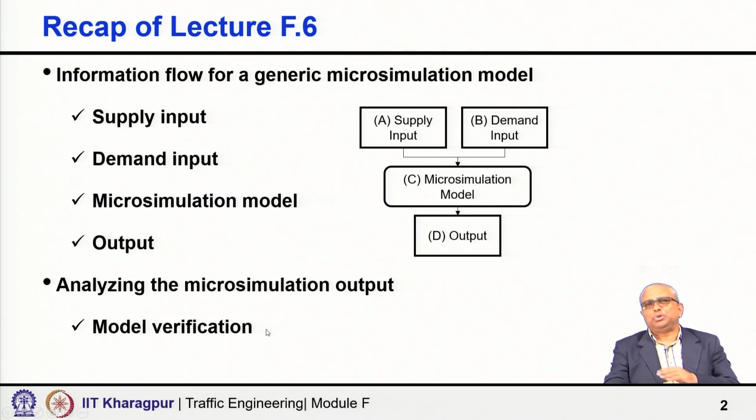So, we shall continue our discussion grossly about the output, this box component D, or here the output component, and we said that model verification, model calibration and model validation all are important. We discussed in lecture 6 the model verification part only. So, in continuation to the previous lecture, today we shall talk about model calibration and also model validation, and then also a few other important aspects regarding traffic microsimulation.

So, coming to model calibration, the ability to accurately and efficiently model traffic flow characteristics, driver behavior and traffic control operations is critical in order to obtain realistic microsimulation results or outputs. How accurately and how efficiently we are able to model all this. You know, there are different components or entities in a traffic microsimulation model. So, how accurately and efficiently we are able to model all such components, traffic flow characteristics, driver behavior, traffic control operations and all this. So, in that context the model calibration is important. Calibration is the process of modifying the default microsimulation parameters.

You know, when you are doing a traffic microsimulation, so many inputs, so many parameters are involved. Some of the parameters you can measure from the field, some of the parameters you cannot measure directly from the field, not so easy, right. So, how the default microsimulation parameters can be modified, so that the model replicates the observed traffic condition as accurately as possible. So, how to set the parameters which will suit, number 1, the context and the geographical areas.

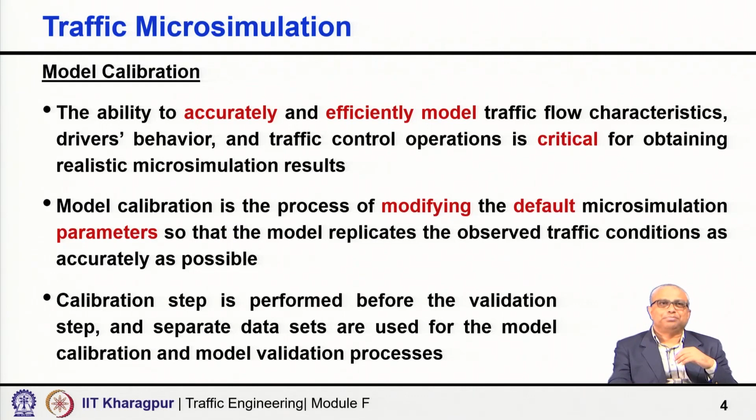What may calibration mean in the context of traffic micro simulation? It may mean setting the micro simulation model parameters properly. Say for example, if you are using Wiedemann 99 car following models, I have already mentioned to you the parameters CC0 to CC9. So, it may be all about what parameter values I use for each of these parameters, so that my output closely matches with reality.

Now, when you are applying this Wiedemann car following model in any European city, and if you are applying it in any Asian city or in India, say in Calcutta or in Delhi or Chennai, will the parameters be the same? No, because the whole traffic environment is very different. So, what may be good and appropriate for a European city may not be good for an Indian context.

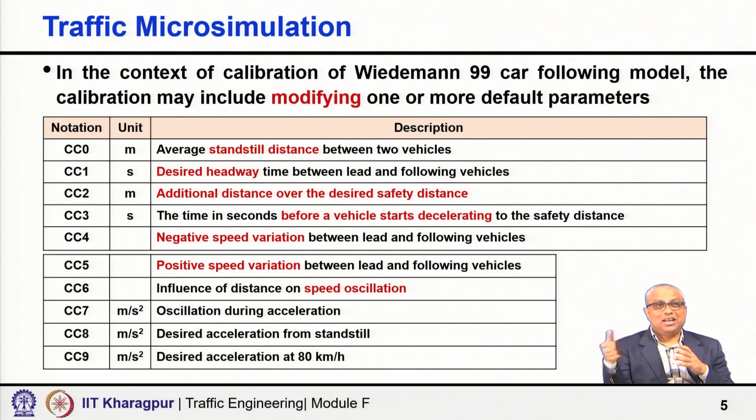So, how to decide, when you are developing a model for an Indian city or trying to apply it in an Indian city, how best this parameter can be taken, so that the output matches with our traffic condition, right. That is all about calibration.

Now, in the calibration process, the first step is selection of one or more field sites. As I say, it is important which intersection, if you are going to take intersections, for example, which intersection or intersections you are going to take. So, we must first select the one or more field sites where we want this model to be applied, right.

The next step is to define a set of performance measures. This relates to the other aspect I mentioned: what you are trying to do, why you are developing this model, what is your objective, right. So, accordingly you decide what should be your performance measure, how you are going to evaluate the performance. So, the performance measure is also very much context specific, meaning what you are trying to achieve.

And then the other thing is site specific or location specific, where I am trying to apply it for intersection improvement. So, for intersection improvement, what set of performance measures I should use, that is one aspect we are discussing here. The other is, once I say okay, I want to improve intersections, are you going to improve intersections in a European city or in an Indian city? That is what you have to select appropriately, then it is to be calibrated for the local condition and for the context. So, accordingly you decide what performance measures you want to take.

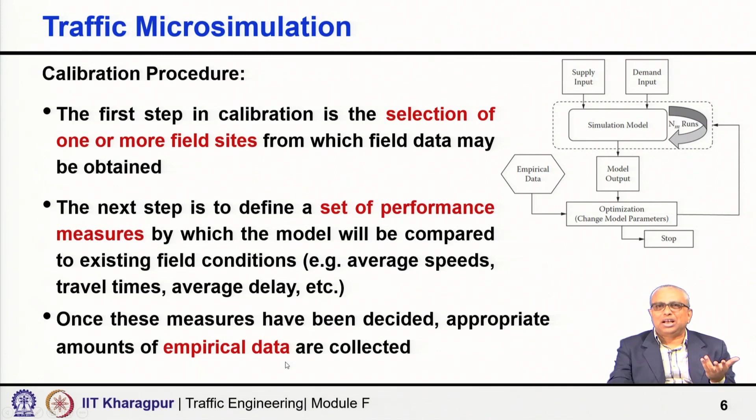Now, the observed network is generally modeled using an initial prior microsimulation parameter set. You have to start with some parameter set, right. You do not know exactly what set of parameters will be most appropriate. So, you start with a trial set, and sometimes it may be the default values.

If the traffic condition is really very similar to the traffic environment on which the microsimulator has been developed, as I said, many of the microsimulation platforms have been developed considering lane-based, more homogeneous, more disciplined traffic environments. So, if you are applying it in a European context or a Western countries context, you can start with the default parameters. But if you are going to do the same thing for an Indian context, you know that those parameters are anyhow not going to work.

So, if there are past studies, previous works where people have said that for this parameter this value is more suitable or appropriate, you can take those things. So, it may be default values, it may be based on previous calibration results, or it may be based on some engineering judgment also. Then you run the model and compare the performance measures obtained from the model with the ones you have obtained from the field data.

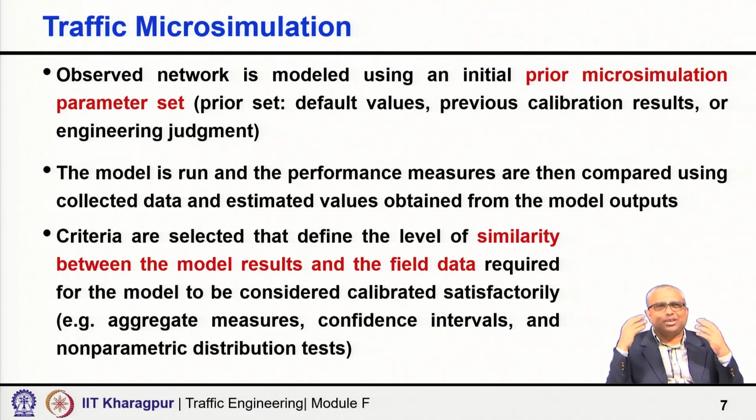So, through the criteria you have to say what level of similarity between the model result and the field data you expect in order to say that your model is calibrated satisfactorily. It could be aggregate measures, it could be some confidence interval, non-parametric distribution tests, a number of things are possible. You often need to carry out statistical tests.

Based on the results of the statistical tests, the model parameters are adjusted if you find that my errors are statistically significantly different; then further tuning, further adjustment of the model parameters may be required. So, the model parameters are adjusted and the same process is repeated until you find your simulated data matches the empirical data within the permissible or acceptable limit, as defined by the criteria. Then you consider that yes, now my model has been calibrated, and you stop the process. Now, remember that often the number of parameters in a microsimulation model is very high.

You have vehicle characteristics related parameters, you have driver behavior related parameters, so many inputs are there. Typically, if you take a good microsimulator, maybe 30 parameters or more than 30 parameters may be required. Those parameters are actually controlling the overall simulation output. So, will you start changing everything? It becomes a gigantic task. Most of the time it may not be required.

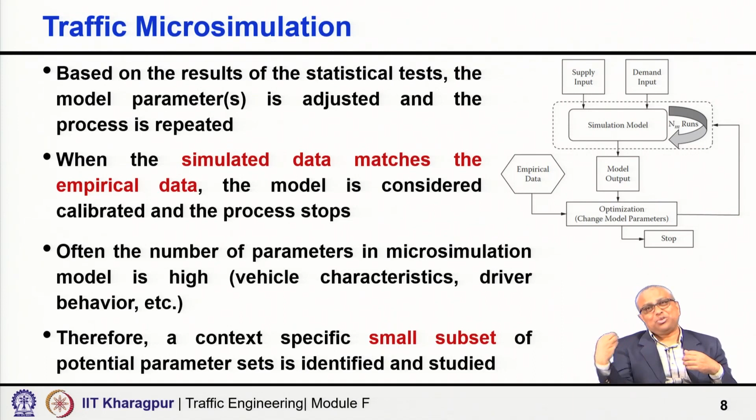Outside, you can use different search algorithms, you can use a genetic algorithm to give a trial, and every time you give a trial set you have to go inside the model and again take simulation runs, not one, multiple simulation runs, and then you compare the simulation output with the observed field data and the process has to continue.

Now, coming to model validation. Validation is the process of determining to what extent the model's underlying fundamental rules and relationships are able to adequately capture the targeted emergent properties of the model. You have calibrated. Calibrated means your output is matching, but have you really captured the relationships properly, or have you simply gone with multiple trials and somehow set the parameters so the calculations are somehow matching? That again needs to be tested.

So, an unknown data set which has not gone inside during the calibration step should be used, where the inputs are known and the outputs or performance measures are also known, and you see how well the model is able to estimate the performance measures and how closely they match the real field observations. Remember that this data set has not gone inside during the calibration.

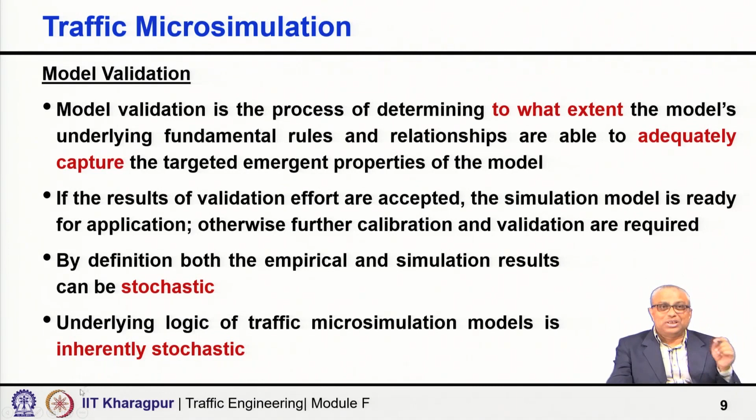So, the underlying logic of simulation model is also inherently stochastic, as I said, because models use a pseudo random number generator, which produces a distinct stream of more or less random numbers for different seed numbers to estimate the probability density function. So, PDFs are there. A given scenario can be analyzed based on the average of several simulation runs using different seed values for random numbers. So, for example, if you run the simulation n number of times with n different random number seeds, then measures of central tendency and dispersion can be obtained.

Okay. So, you have n number of runs with n different random number seeds, outputs are there. Now, with all the outputs together, you can measure a central tendency, you can measure a dispersion. Similarly, in the field also you have a central tendency and a dispersion. Many statistical comparisons are possible. Due to the stochastic nature of the observed and simulated data, statistical techniques are necessary for making informed decisions regarding the quality of the simulation results.

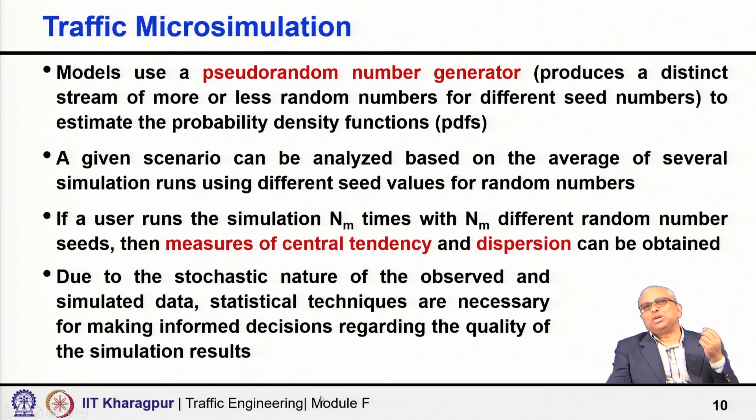Coming to the statistical analysis of micro simulation output, it is often required to know whether simulation results are valid or whether there is a significant difference between the results in a statistical sense. I say in a statistical sense, two numbers may be different, two mean values or average or expected values may be different, but are they statistically different? Two things are different, right.

So, this can be determined by comparing the simulation result to one of the three sources that follow. This is for your general understanding, that for all the output you get from a simulation model, there could be three sources for comparison or check purposes, right. So, one is the deterministic values you have got, you can compare those based on theory or common practice. For example, the simulation results also may give you the capacity. Now, the capacity value from a micro simulation analysis can be compared easily with the capacity calculated from the highway capacity manual or the country specific guidelines or norms.

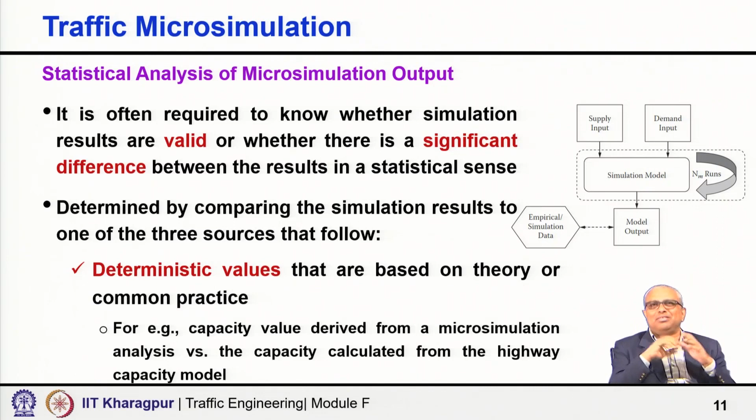So, you know that this kind of road or this kind of facility normally should have this value as capacity. So, you can compare what you got from the model with that. You do not need to go and measure it in the field, because you know what the capacity manual or the relevant guideline, in our case maybe the Indian Roads Congress guidelines, are saying. So, I can match it. If there is a general agreement, then I can know that okay, it is giving reasonable and satisfactory performance.

The other is empirical data, the simulation model outputs can be compared with the empirical data obtained from one or more field sites. You have actually gone to the site and measured the delay and you are comparing. So, the empirical performance measures can be collected manually by the users or even automatically by existing detector equipment. How you collect the data is a different ball game, right. But you can collect it manually, automatically, you can do videography and then do the data extraction, so many things are possible. But basically compare what you have collected from the field with the output.

Another thing is also possible, output for two micro simulation runs that have different supply or demand characteristics. For example, you have taken simulation runs for two different scenarios, sim 1 and 2. Maybe simulation 1 might use a current traffic control system and simulation 2 an improved traffic control system. Then you compare. So, I can simply compare 1 and 2. Two outputs can be compared to see how the improvement is happening, right. So, whatever output you are getting, there are three different ways you can actually do the comparison.

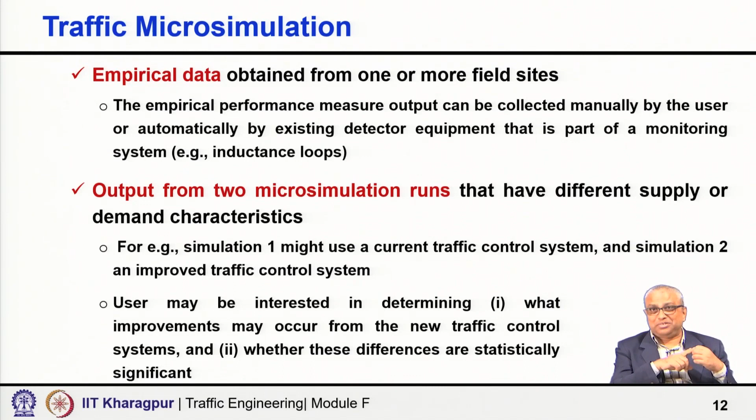In this case, the user might be interested in determining what improvements may occur from the new traffic control system and also whether these differences are statistically significant. You cannot simply compare two numbers, because they are all coming from different numbers of simulation runs with a central tendency, with a dispersion, probably with a distribution also, right. So, whether the things are statistically different, or if they are different, are they statistically significantly different, right. These also need to be checked.

Then in this context, identifying the statistically optimal number of simulation runs is important. I said by nature there is stochasticity in the simulation outputs also, right. So, with just one simulation run you cannot compare, you have to take multiple simulation runs. How many simulation runs? So, it is useful to calculate how many simulation runs are required for a particular analysis in order to obtain statistically significant results.

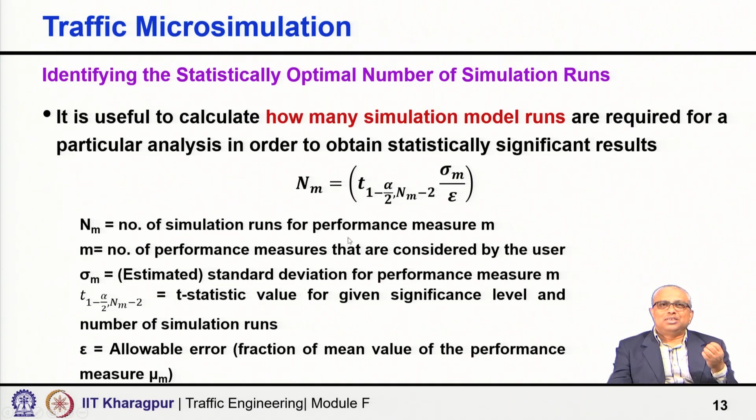So, here is the formula that can be used. Remember that this is based on the t statistic value for a given significance level and number of simulation runs, then the estimated standard deviation for the performance measure and the allowable error that you accept. The problem here is, other things could be assumed, but in order to solve for N_M, the standard deviation of the performance measure is required.

Now, how do you get it? This is the problematic thing, as it will not be known until the traffic simulation runs have been taken. So, one possibility, of course, is to assume a value based on past experience, because many of those who work with traffic simulation are doing extensive work. So, you may assume a value based on past experience, or you can use an iterative approach.

For example, step 1, run a few simulation runs, and a typical number would be in the order of 10. Take the runs, then you have some output. So, you calculate the mean and standard deviation of each performance measure M, because there may be, say, 5 performance measures. So, for each of these 5 performance measures, you calculate the mean and standard deviation for the number of runs you have taken.

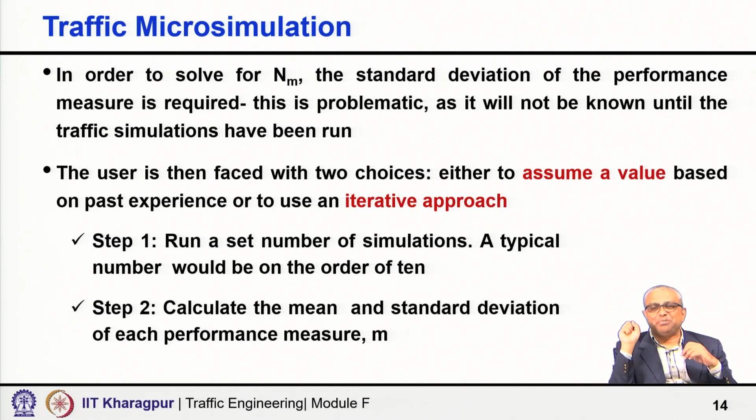Now, calculate N_M, the number of runs required for each performance measure M separately. For each performance measure, the standard deviations are not the same, so the required number of simulation runs is unlikely to be the same for every measure. So, take the highest value considering all the performance measures; the highest value is the one required for the analysis. Then compare the number of simulation runs completed with the number identified in step 3.

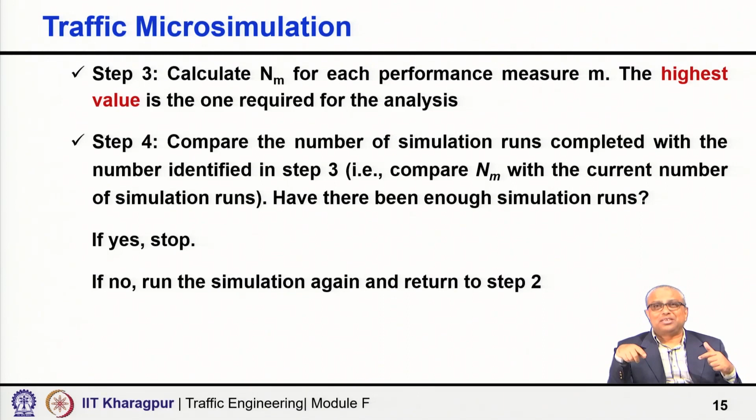So, compare N_M with the current number of simulation runs, because you have taken only a few trial runs. Have there been enough simulation runs? If the answer is yes, then stop. If not, then take additional runs. Once you have taken the additional runs, you can again calculate the standard deviation and check whether the number of runs you have taken is adequate for all the performance measures.

Now, for comparison purposes, we often use aggregate goodness of fit measures. Goodness of fit measures can be used to quantify the degree to which the model results fit the field data. Why do we say aggregate? Because all the measures are combined into a single metric. That is why we call them aggregate goodness of fit. There are many possibilities for such measures.

For example, you can use mean absolute error, O_i minus E_i. O_i is the field-observed measure of performance, and E_i is the same performance measure estimated by the simulation model. So, the absolute value of O_i minus E_i, because it is mean absolute error, summed over all n and divided by n. The total number of observations is n.

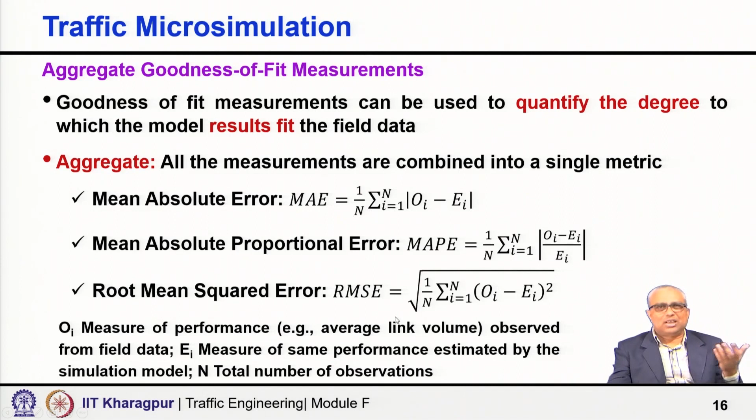Or it could be mean absolute proportional error. Proportional means O_i minus E_i divided by E_i, the normalized proportional error, summed over n and again multiplied by 1 by n. Or it could be root mean square error: the square of the difference O_i minus E_i, summed over n, times 1 by n. So, these are the possibilities. Now, one decision is whether we consider absolute or relative model accuracy. Both may be meaningful; it all depends on the context.

When considering which micro simulation package to use, this is another decision. A key question, which is often overlooked, is identifying the intended application. What am I trying to do? Am I trying to model an intersection, or see how intersections can be improved, or am I modeling a corridor, or trying to see how other changes in the infrastructure or control system are going to have an impact? What is the application? What kind of improvement am I looking for?

That intended application, and whether the micro simulation platform has got this capability to satisfy my requirement, that should be the first thing. Different micro simulation models, therefore, may be preferred depending on the application, along with which statistical approach will be required.

For example, if the application requires that a specific performance measure be provided, such as intersection control delay, then the model must offer accurate estimates of this parameter, otherwise there is no point in using that platform. So, what I want to do, what measures are required for me, the model should be able to estimate accurately. That is the first requirement and probably the most important requirement.

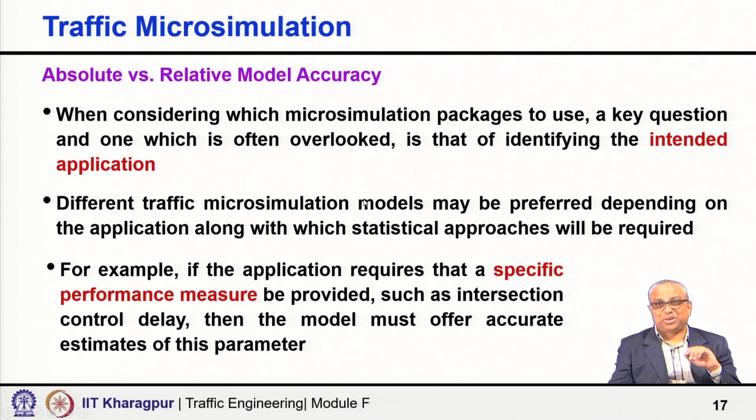So, what I want is which is supposed to work better than others, which alternative is more desirable than others. That is the reason why I am developing this model and testing it. So, as long as from alternative to alternative it can capture the difference properly, my purpose is served, it is good enough for me. So, I do not need here the absolute model accuracy, but it is the relative model accuracy that is important for me, depending on the application context.

And here I have mentioned some of the domains and the corresponding applications. For example, if you are thinking of traffic operation, then setting optimal signal timing plans, analyzing the capacity of roadway and calculating travel time. If you are thinking of roadway design, then identifying the feasibility of different designs and analyzing merge conditions could be the applications of interest to us while doing traffic micro simulation.

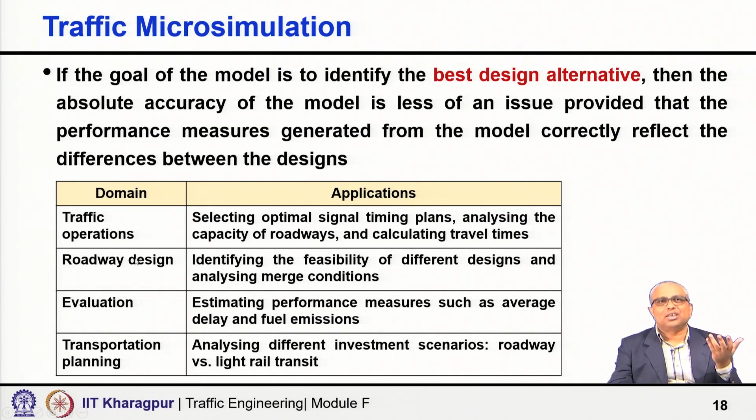It could be evaluation of performance measures such as average delay, fuel emissions, again very important, or it could even be a transport planning application, analyzing different investment scenarios, road versus light rail transit. So, these are the different domains and applications where we would be interested.

Coming to performance measures, they are broadly used for simplification, quantification and communication. You want to communicate the results to policy makers, even politicians, decision makers. So, it has to be simple. With the performance measure, you can simply present: at present it is like this, in future it is going to be like this if you do this intervention.

It is easy. They do not need to understand how one vehicle interacts with another vehicle, what car following is happening, how the interaction is happening with other roadway and control elements. They simply need to understand whether it is going to solve my problem at the end of the day. So, the performance measures are very useful.

The output from the simulation model is used to quantify performance measures, which can be categorized in 3 types. Sometimes they could be point measurements, for example, the spot speed or throughput at a given location. It may be link based measures, for example, the link travel time, space mean speed, delay, or it may be corridor or system measures, overall average vehicle speed, average person delay and so on. So, you select performance measures appropriately as per the context and your requirement.

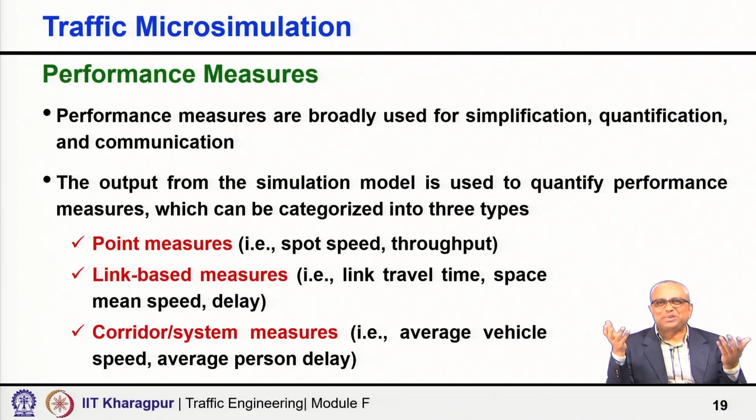So, today we discussed how to analyze the micro simulation output, particularly model calibration, model validation, the statistical analysis of micro simulation output, identifying the statistically optimal number of simulation runs, aggregate goodness of fit measurements, absolute accuracy vis-a-vis relative model accuracy, and also what kind of performance measures, point measures, link based, corridor based or system measures, and how to choose the performance measure.